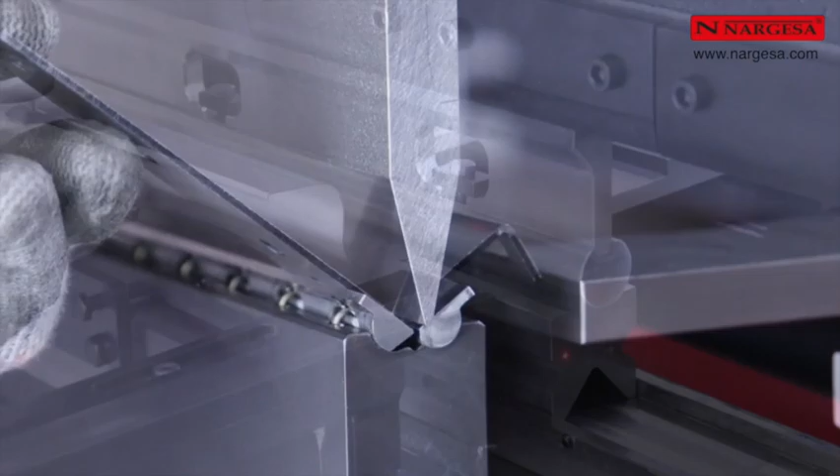All NARGESA machines have been designed, machined, and assembled in our facilities under strict quality controls.

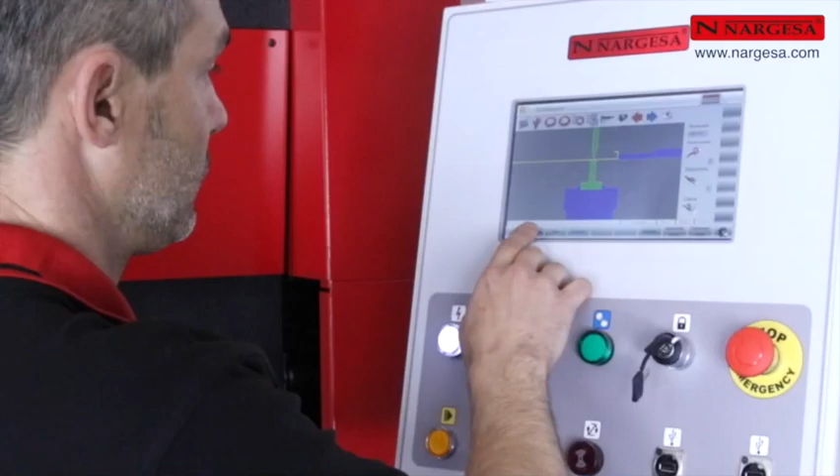We will begin this tutorial clip showing how to obtain this 6-part fold, all of them at least 90 degrees. Before starting to fold, it is essential to check this chart to determine the opening of the die that we must use. In this case, we know that the thickness of the sheet indicated with the letter E is 2 millimeters.

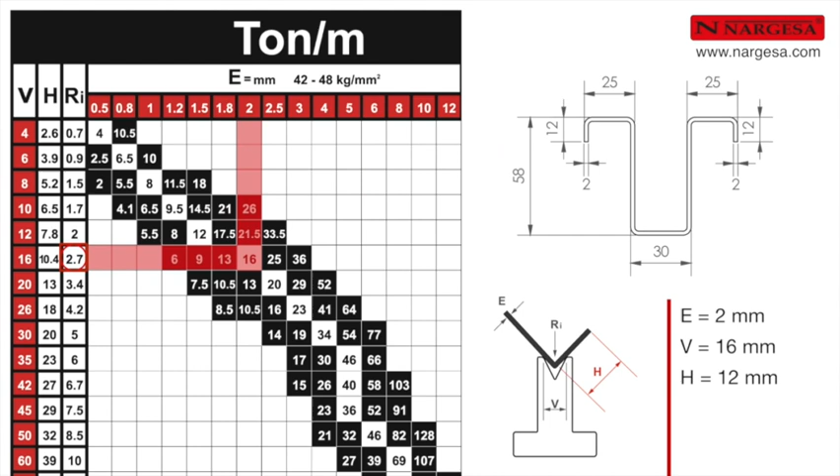For this thickness, it is to be used a V of 16 millimeters. The letter H indicates the minimum folding flap, or minimum folding length, 10.4 millimeters. In this case, it is enough, since the minimum flap of the piece is 12. The letter R indicates the theoretical internal radius that we will obtain. With 1 meter length, we will need 16 tons to make the folding, bearing in mind that it is a mild steel sheet, with a hardness of 45 kilos per square millimeter.

Now, we select a punch that allows us to make this geometry. If the punch, or the die that we have chosen, does not allow us to make the part we need, the control of the machine will indicate a breakdown or collision as soon as we make the program run.

To create the program, we select New Program, New Graphic. Then we fill in the fields with the data we have taken from the drawing and the chart. We know that the width is 1,000 millimeters and the thickness is 2 millimeters. As for the resistance of the material to bend, we will select values between 31 and 50 to work iron or carbon steel. Normally, it is 45 kilos per square millimeter.

We choose a die out of our library based on the marked requirements. For these parts with little distance between bends, it is advisable to use a die in T, because it is higher and narrower, so it will avoid collisions. The reference of the die gives us all its features. The first figure tells us its height. The second one indicates the opening of the V, and the third one, the minimum degrees of the fold.

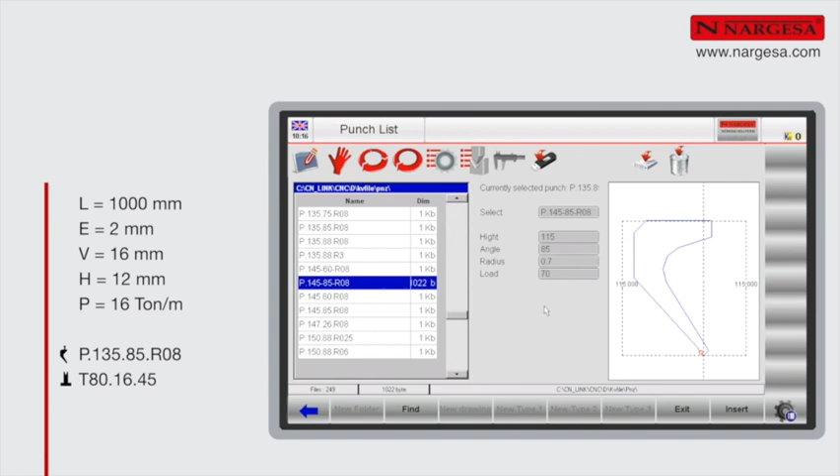We put it in. Then we select the punch, taking into account its characteristics. The first figure indicates its height. The second tells the minimum degree of the fold, and the third, its radius. We insert it.

We begin to insert the dimensions of the geometry by one of the two ends of the piece, with the links indicated in the drawing. We insert the information in the fields in the upper right part of the screen. By default, it shows a distance of 20 millimeters horizontally. We press the up arrow on the CNC to indicate the direction of the first section of the piece and enter its height into the field L, 12 millimeters.

The next section is towards the right. We indicate it with the pointer by pressing this arrow. We introduce its dimension in the field L, 25 millimeters. The next section is down, indicated by the cursor arrow. We introduce its size in the field L, 58 millimeters. We press the arrow to the right and introduce the 30 millimeters in the field L.

Then, we proceed with the arrow pointing upwards, 58 millimeters. We continue with the arrow to the right, 25 millimeters, and finally, down, to 12 millimeters.

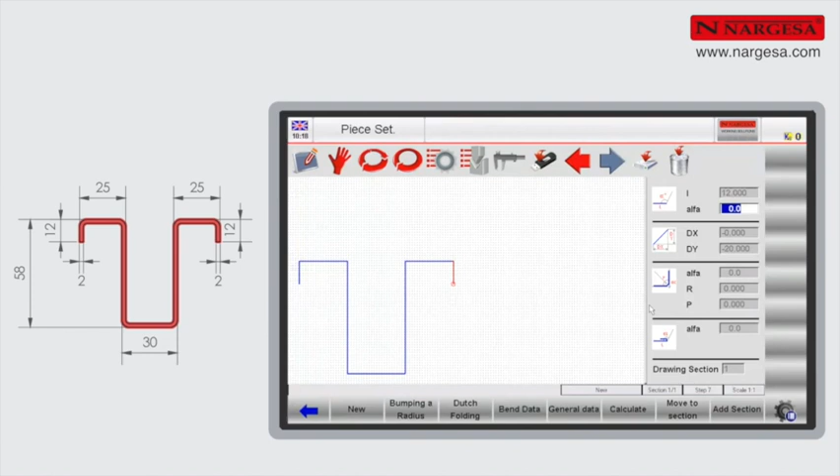Then we press the Calculate button, and the simulation appears on the screen. We press Optimize, and the CNC performs the calculations to find the optimal solution, avoiding collisions and reducing the number of operations. The CNC will indicate when it finds the solution. We confirm and press Simulate, so we can visualize the whole process in the simulator step by step.

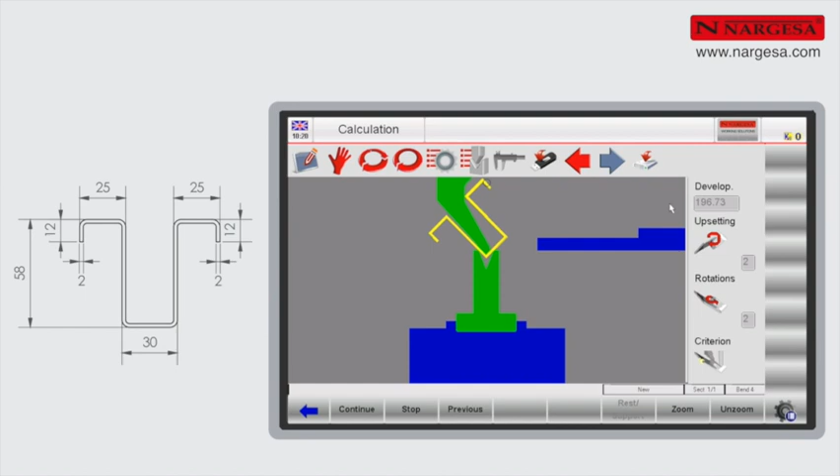It also shows us the development, which means the total length that the sheet to fold must have, the number of upsettings, and the rotations that we will have to make during the folding process. We save the program with the name Demo1. We accept, then we press the button Programming to display all the features of this part on the screen.

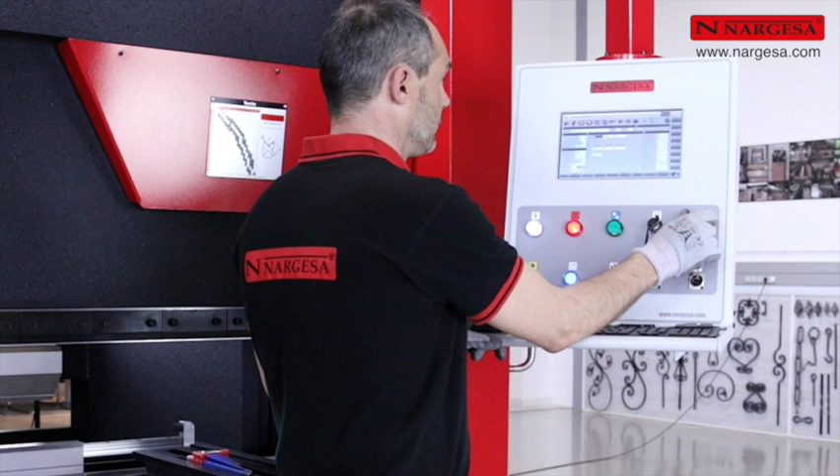We place and fix the punch and die to the press brake. We adjusted the lasers 8 millimeters below the punch as a safety measure. We unlock the emergency stop button, reset the safeties, and operate the machine in manual mode. For achieving a proper operation and durability of the punch, it is essential to fix it correctly.

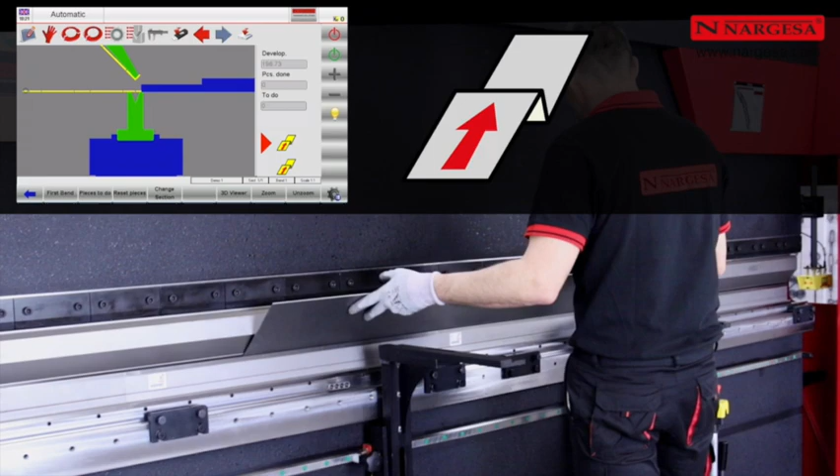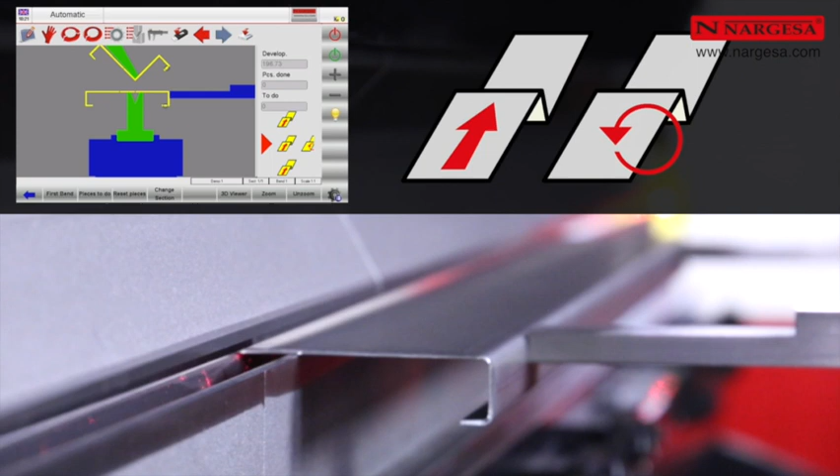We activate the machine in automatic mode to execute the program. As we make the folds, the screen shows how to place the metal sheet for the next operation. This symbol indicates that we introduce the plate by the same side that we are already folding. We continue on the opposite side of it. To finish, we rotate the piece, introducing it by the same side that we are working.

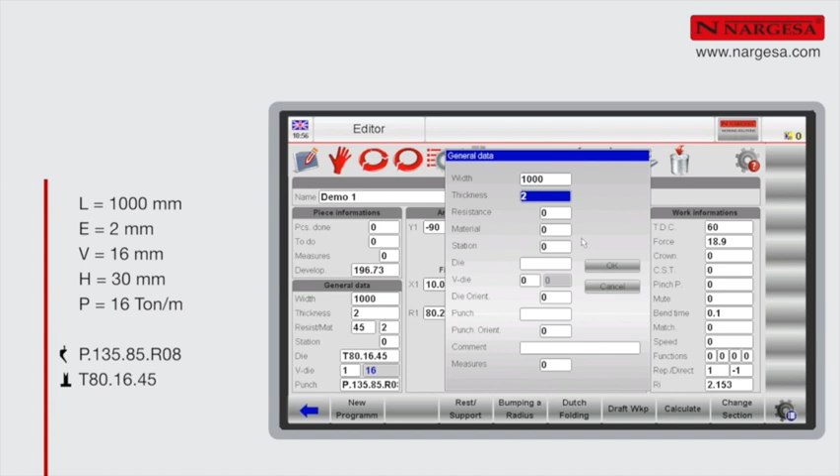We use the same procedure to program this part. We select New Program and New Graphic. We know that the width is 1,000 millimeters and the thickness is 2 millimeters. The resistance of the material to bend is 45 kilos per square millimeter.

We choose the same die and the same punch as in the previous parts because the minimum distance between folds is still small. We confirm. Then, we put in all the sizes of the geometry in the corresponding fields.

We will start at the bottom end of the piece. We insert the dimensions of the first section, 50 millimeters. In the cursor window, we press the down arrow to indicate the direction of the fold and enter its height in the field L, 30 millimeters.

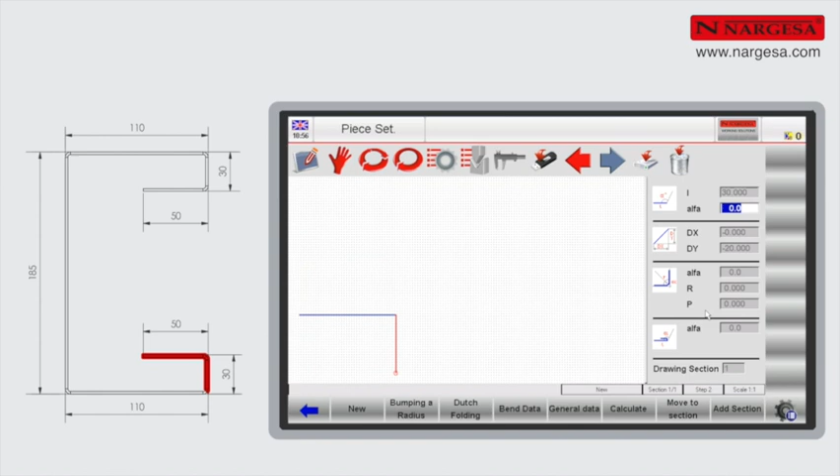The next section is to the left. We indicate it with the cursor by pressing this arrow. We introduce its dimension in the field L, 110 millimeters.

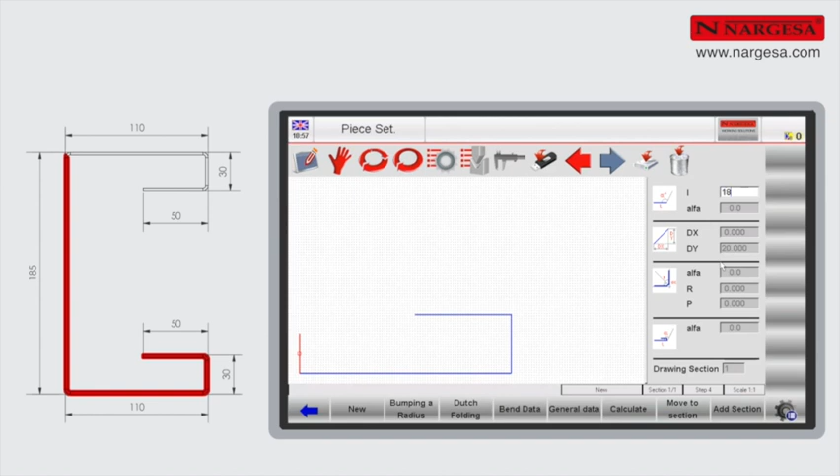The next section is up. We indicate it with the arrow. Next, we introduce the dimension in the field L, 185 millimeters. We press the arrow to the right and introduce the 110 millimeters.

We proceed with the down arrow, 30 millimeters. Finally, with the arrow to the left, 50 millimeters.

Now we press the button Calculate and the simulation appears on the screen. We press Optimize, the CNC finds a solution and we confirm. Then, in order to see the whole process, we just press Simulate and it will run from the very beginning.

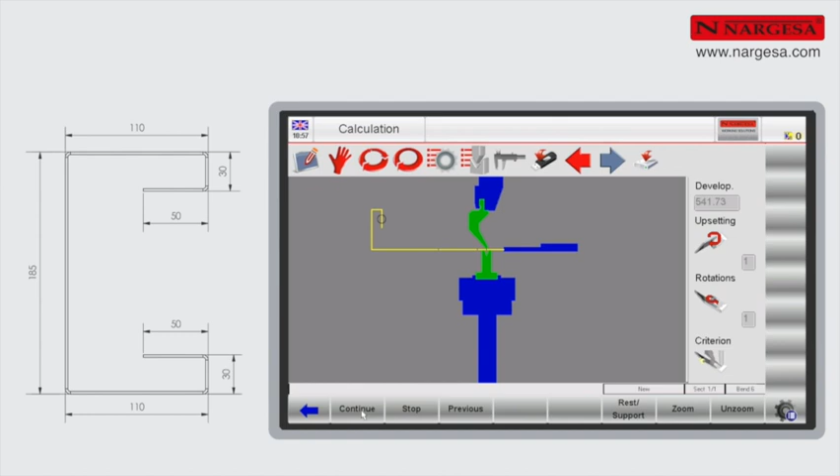The development will allow us to know that we must cut the metal sheet to 541.73 millimeters to be able to fold this piece with these dimensions. In the process, we will make one turn and one rotation. We save the program on the disk with the name Demo 2. We confirm. Then we press the button for Automatic Mode to execute the program.

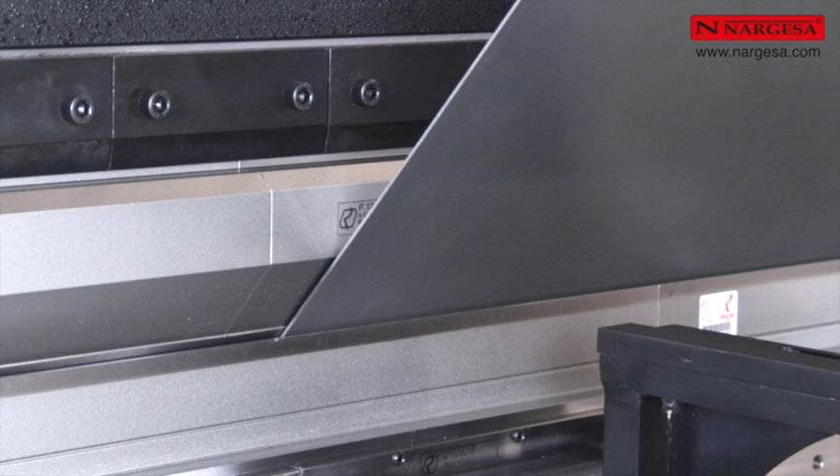There will be some moments, and due to the tolerance of the materials, when it is possible that the folding angles need a correction. To correct this disparity, we will insert, in the corrections field of each fold, the number of degrees that we need to correct.

In this case, all the folds have been at 91 degrees. We will enter the value 1 negative in the first fold, and we will use the arrow in the menu to go to correct the next fold and so on until we have the 6 bends corrected.

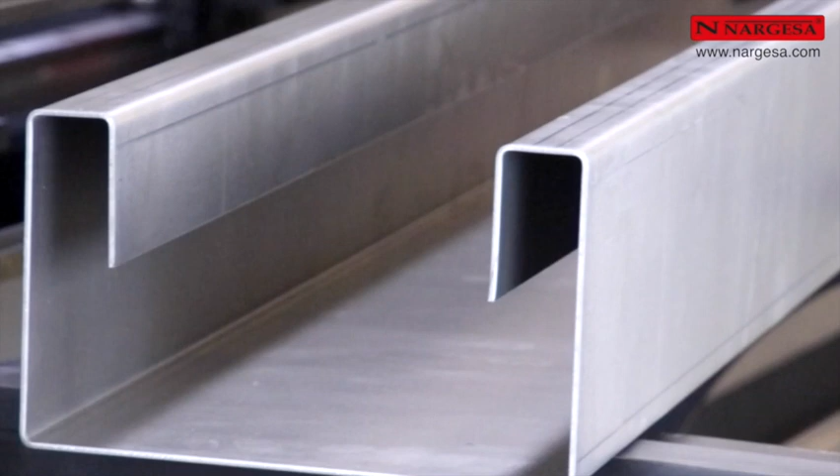We will replace the punch and the die to make the calendar operation. The calendaring is a type of folding that allows to obtain different bending radii in a sheet from multiple sequential bends.

We introduce all the information of the material to fold. For iron, we select a value of 50 kilos per square millimeter.

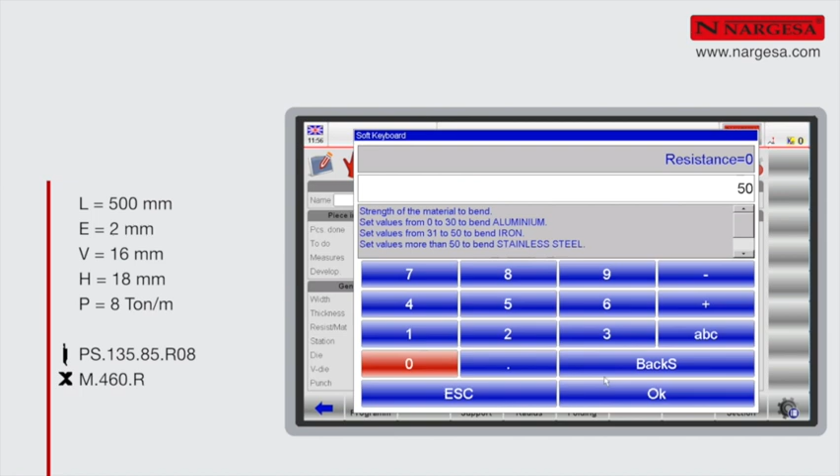We will use a multi-V die because the width of its base will provide us with more stability. We must indicate the slot that we will use. As we have already seen, the optimum slot for 2 mm sheet is the V of 16.

Whenever the piece to obtain allows it, we will use punches that work on its vertical axis. These kind of punches have a better resistance to pressure because unlike the previous punch, the axis where the force is made is solid.

We proceed to enter the dimensions of the piece by pressing the up arrow of our keyboard to indicate that the first section is vertical.

In order to program the calendaring operation, we press the Bumping a Radius button. By default, we see this direction of 90 degrees, a radius of curvature of 15 millimeters, and a distance between each fold of a sequential pitch of 3 millimeters.

We enter the data for our calendaring. The direction is already correct. As for the curvature radius, we enter 40 millimeters. And finally, we put a length of 5 millimeters between fold and fold. We choose this length depending on the type of finish we want. The less distance we leave between the folds, the better the curve will be defined and finished.

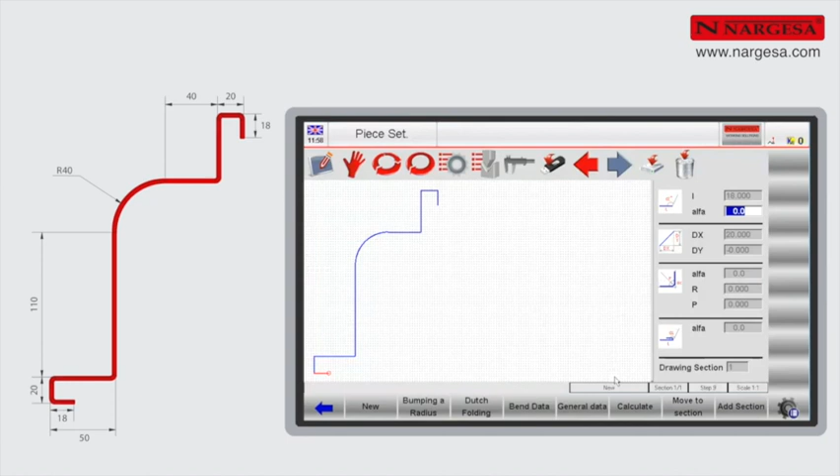In those cases in which it is possible that the sheet does not get placed correctly and falls, we can use the support of the gauge needles to hold it during this operation. This eases up the folding process.

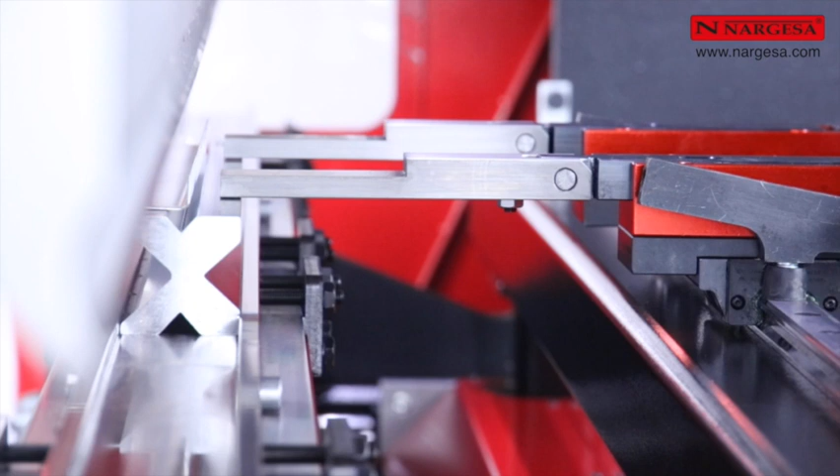In this sequence, we can clearly see the function performed by the gauge support needles. They hold the weight of the sheet and act as a stand, so the handling could be easier and smoother.

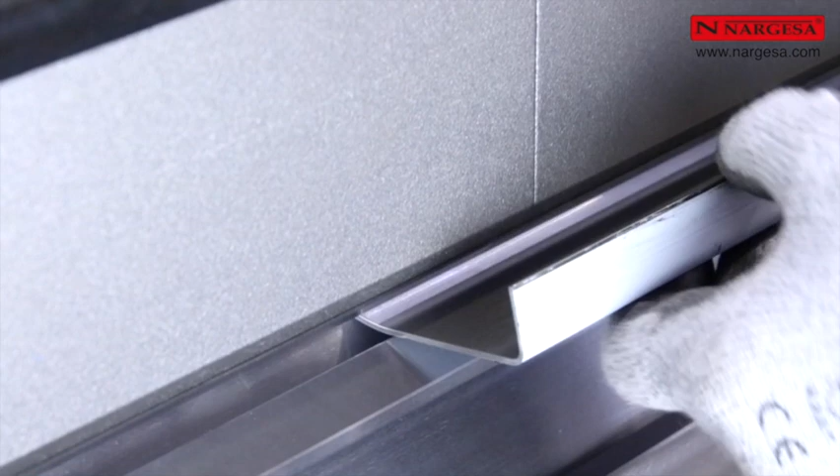We place the swinging die with springs to make bends of 180 degrees. These dies have got two folding areas. In the first zone, we perform the previous folding, obtaining a more closed angle than 90 degrees, and in the second, it makes the Dutch folding to 180 degrees, or crushed down.

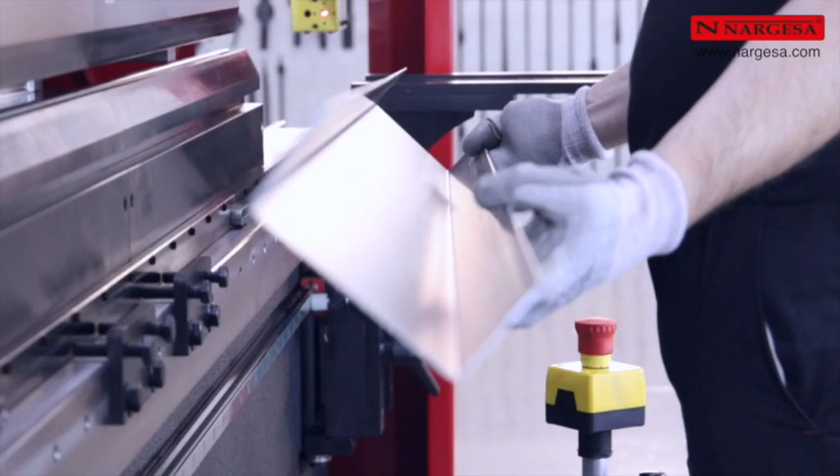We are going to make this especially complicated piece, and we will check that it is really the control of the machine, the one making all the job.

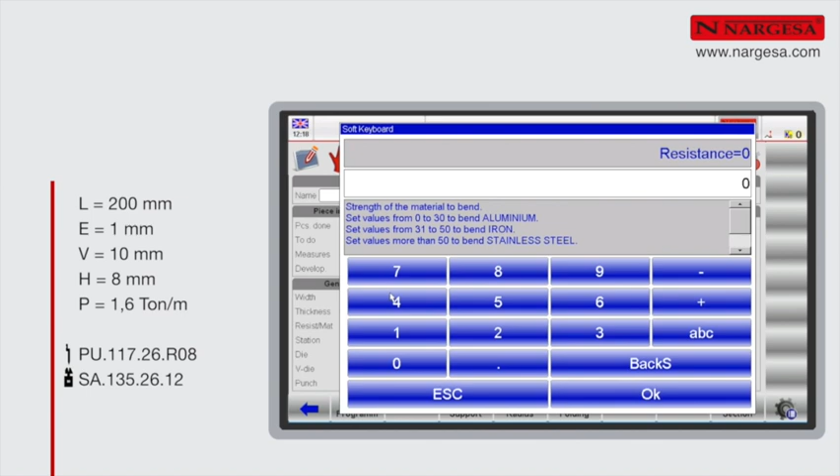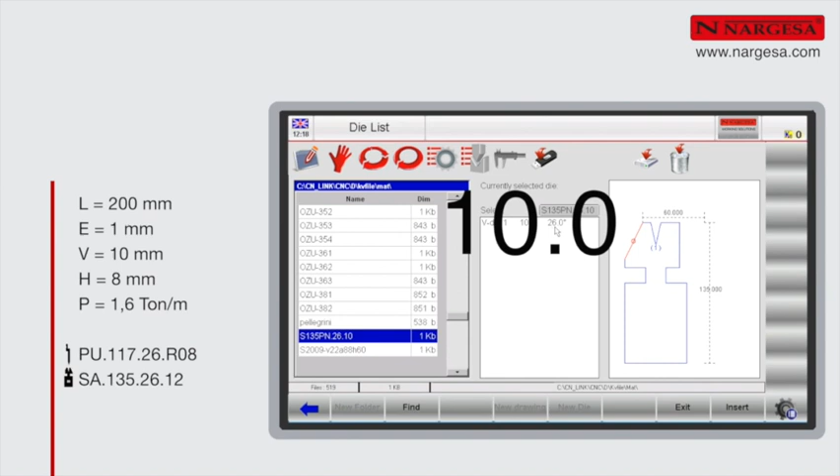If we want to program this type of folding, we proceed in the same way, entering the material information. We insert the die of 26 degrees and with the V of 10, indicated for sheets of 1 mm. To be able to do the deep folding, we must use a punch with the same degrees as the die, in this case, 26 degrees.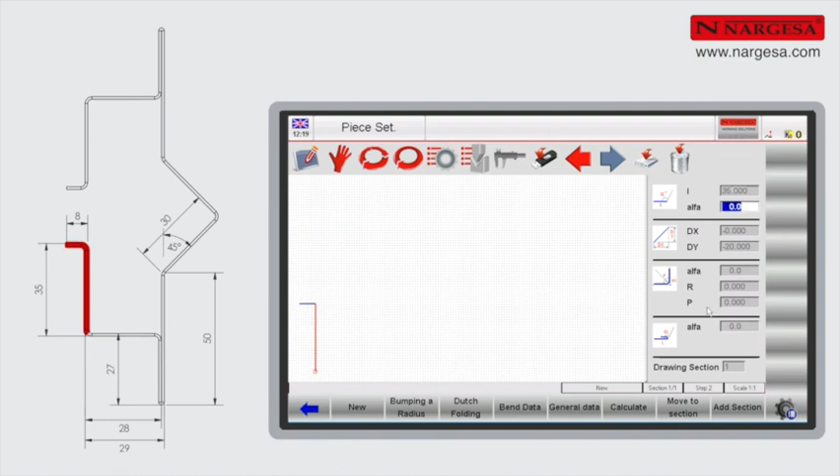To define the Dutch folding operation, we select the Dutch folding option and insert a 60-degree angle in the alpha field. This will be the first one of the two folds. The second one will always be the deep fold, so it's all the way through. We continue with the 50 mm length until the next bend.

We indicate that this fold is diagonal to 45 degrees by using the cursor arrows, and that it has got a length of 30 mm. We also specify the direction of the next fold with the arrow of the cursor, forming an angle of 90 degrees.

In the next Dutch fold, we proceed in the same way by pressing this button and indicating an angle of 60 degrees.

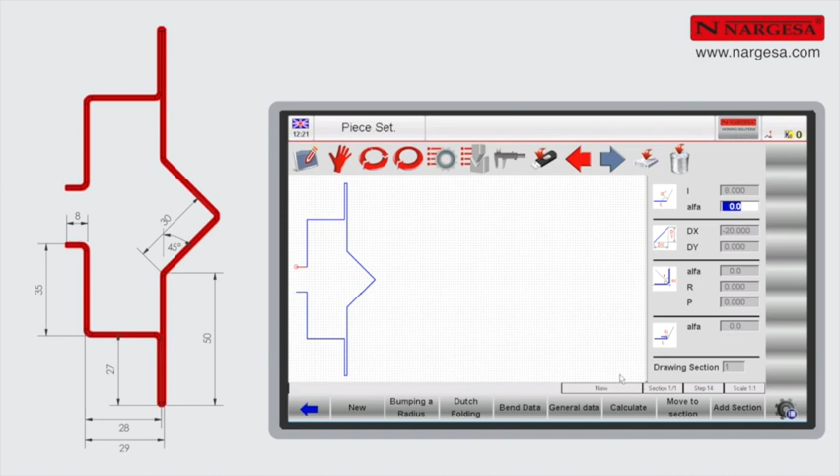When we order the machine to make the optimizations, the CNC has control on the gauge movements. We observe perfectly the movements of the x-axis of the gauge on the simulator. This x-axis is the one that moves forward and backward. We can also get to see the movement of the r-axis, which moves up and down.

The press brake CNC calculates and performs automatically all small movements of the gauge. If it senses that the piece will collide with the rear gauge while making the folding operation, it will move it away some millimeters to avoid this collision.

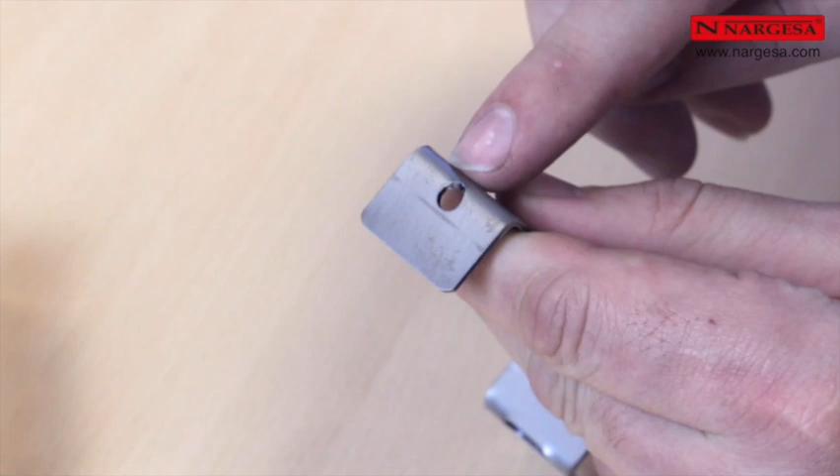The finished qualities of this type of folds are perfect. We can see it in the following examples: a folding operation using a conventional die and the other with the Rolla V die.

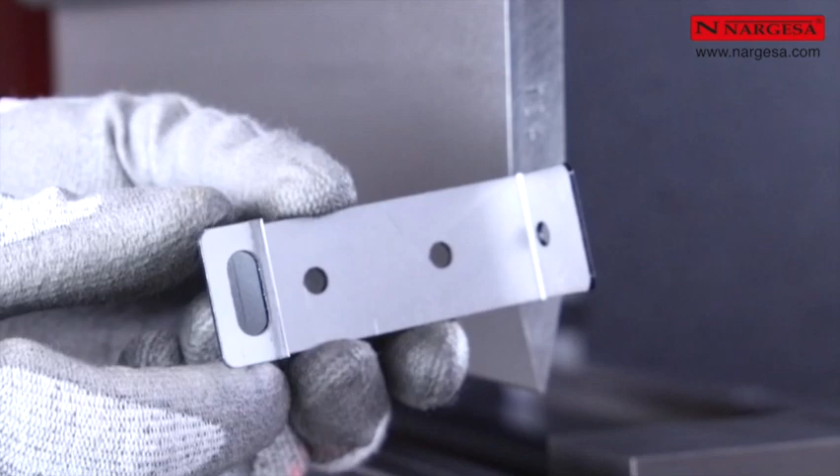There is the same problem with the minimum flap in diagonal folds, which we can solve if we use the Rolla V die. The characteristics of this die are optimal for folding polished stainless steel sheets, so we will obtain a marks-free folding result, 100% guaranteed.

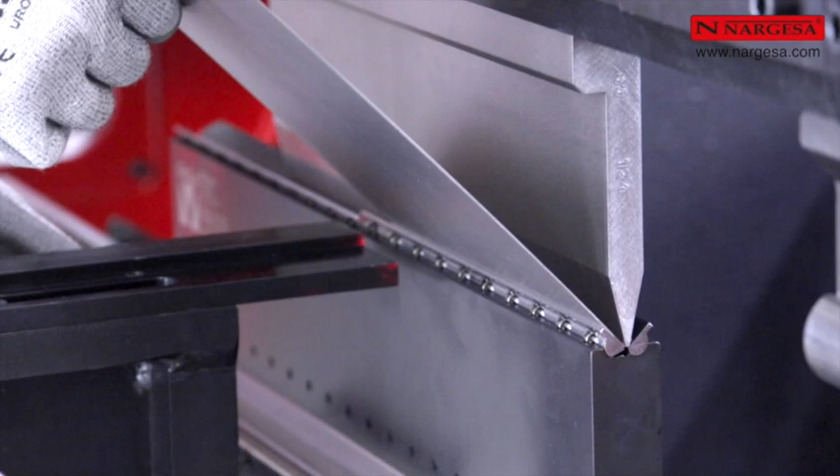The length of the fold of the MP3003 CNC enables us to place several punches and dies to perform different operations at the same time, which opens up the door to different workstations so all the piece will be finished in a single manipulation. In the first zone, we will make the fold of the minimum wing with the Rolla V die.

In the second zone, we will perform the fold with a punch for a big radius. These punches are fixed to the end that can be placed on the machine and allow us to make these bends with different parameters just by changing the end of the punch.

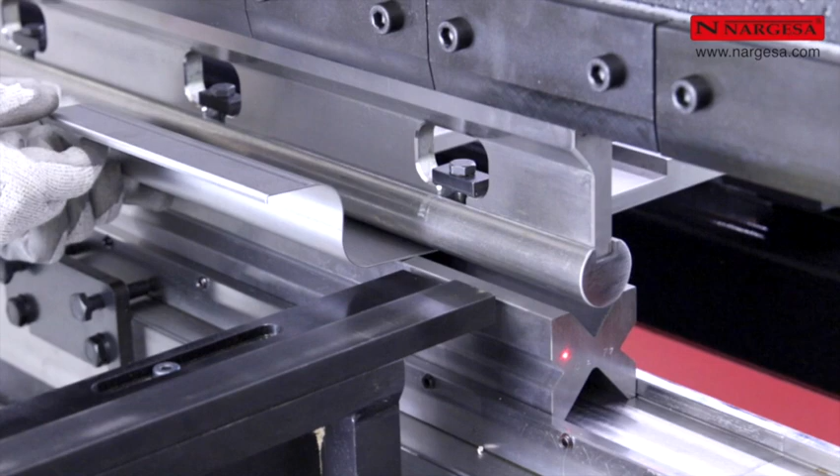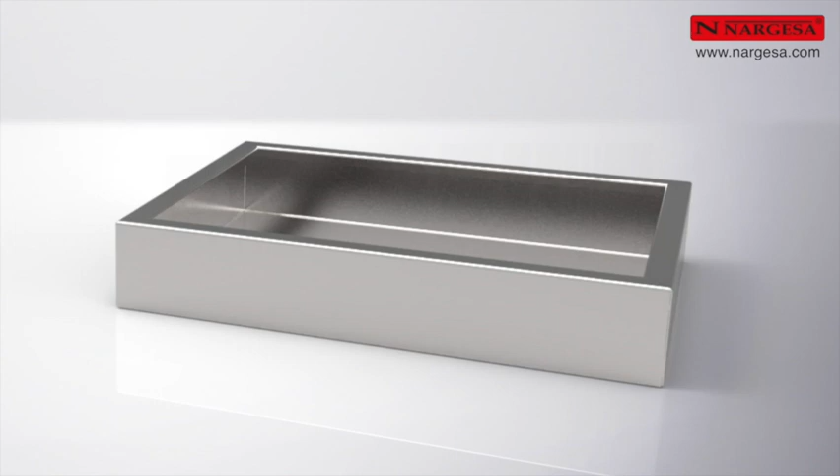All punches and dies can be supplied in a sectioned version. This feature is essential to develop parts with two or more sections, such as trays or boxes, where the folding axes are perpendicular. We put the anvils in both ends. Its shape, with longer length in the lower part, will allow us to make the folds that close the piece. We select the different sections of the punch so that their total length is less than the size of the largest fold.

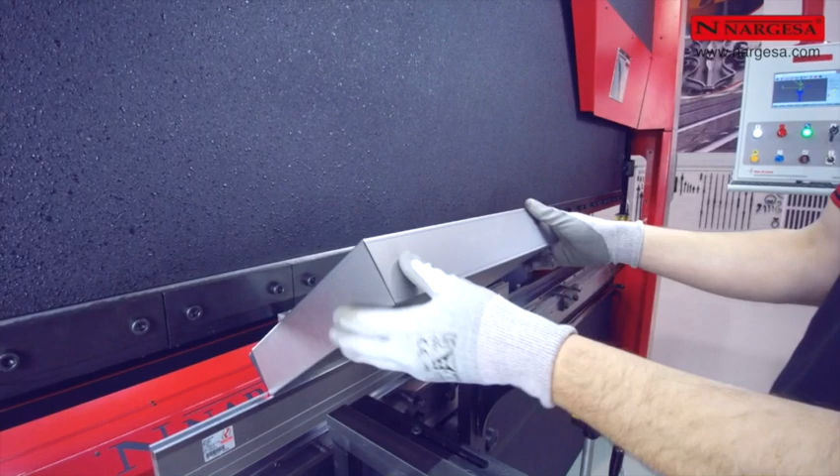In this case, the largest fold is 400 millimeters, and we will place the punches so that their total length is 390 millimeters. We always bear in mind the largest fold, because that way we make sure the punch length is enough to perform all the folds of the part to obtain.

For the programming of the folding of boxes, we will generate two sections. For inserting the information, we can begin with either of the sections indistinctly, because it will be the CNC indicating the order of the folds. In this case, we first insert the dimensions of the 400 mm section. It uses a T-shaped die with a V of 10 mm, mostly recommended for 1 mm thick sheets.

Once we have all dimensions inserted, we press the button Add Section, and then the button General Data. It shows a chart we must complete with the data of the second section. We will only modify the length, because the other information is the same as in the previous section. We proceed to the introduction of the dimensions.

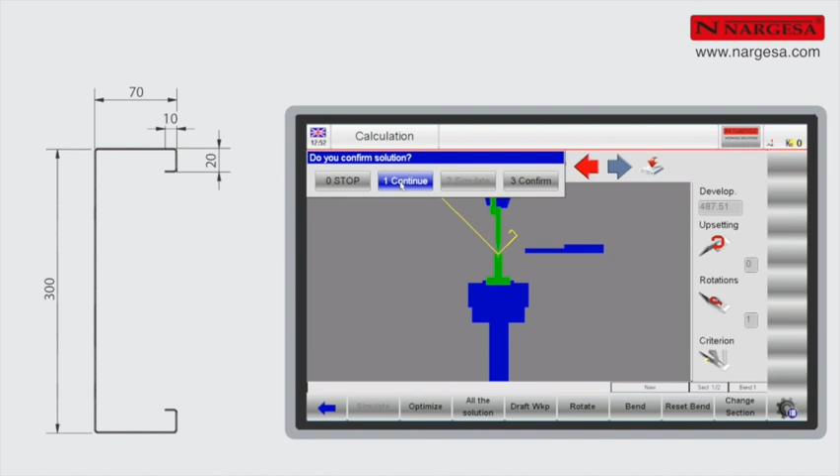The simulator indicates the development and the section number at all times, section 1 of 2. We confirm to see the simulation of the second section of the piece. As in the previous pieces we have made, it shows the development and the section number, 2 of 2.

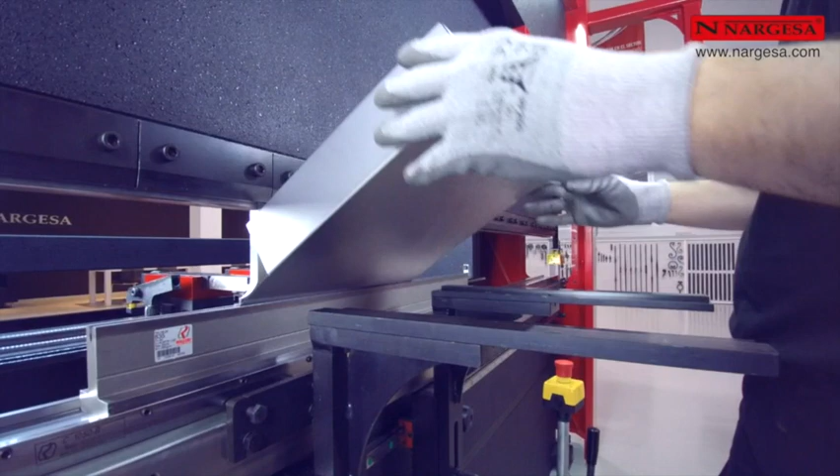On this part of the process, we can see why we use the horns to fold boxes. It would have been impossible to make these last folds, since the side parts we had already folded would have collided with the punch.

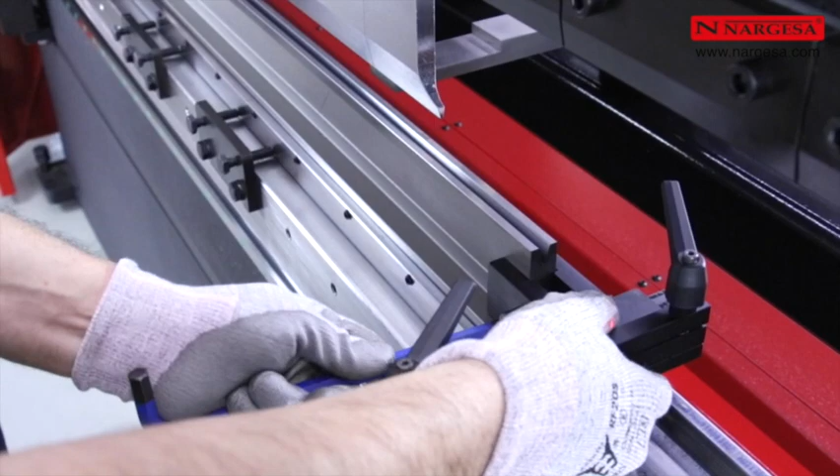For folding without marks with a conventional die, we suggest the use of this protective film that we place on the tensors, which fixes at the same time to any die. This material eliminates friction between the metal sheet and the die, obtaining a result without marks, optimal for stainless steel, aluminum, and delicate materials such as brass and copper.

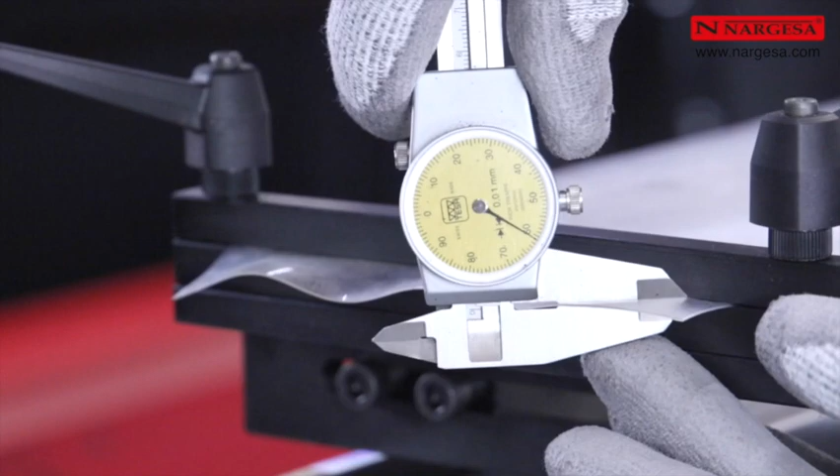It is essential to add the thickness of this plastic film to the sheet thickness in order to program the piece where we will use it.

We check that once we have removed the protective plastic film, we really obtain a folding without any sort of mark. The press brake MP3003 CNC NARGESA has a welded frame, stabilized, and with high-precision machining.

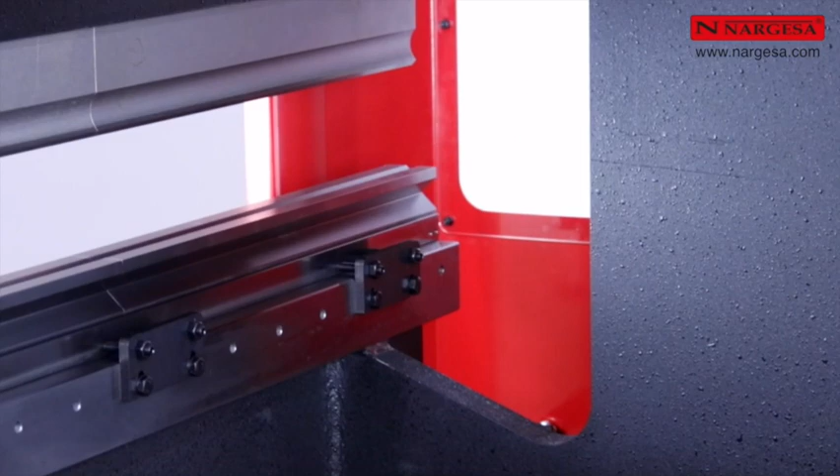The large neck enables the folding of large pieces. It has LED lighting incorporated in the folding area, and centralization of all hydraulic components in a single block. One laser security barrier is also integrated as a safety device.

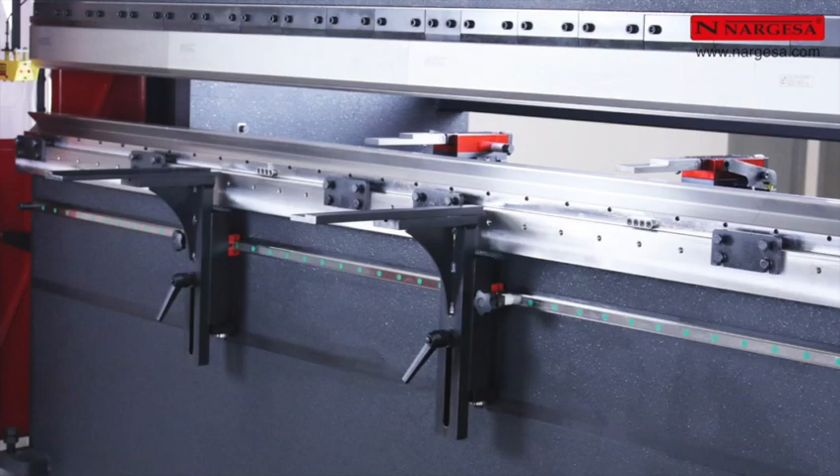The clamping system for the punches is Promecam, with sliding arms for an optional support of the sheet. Folding side doors facilitate the change of tools, and a multilingual interface offers more than 20 languages available.

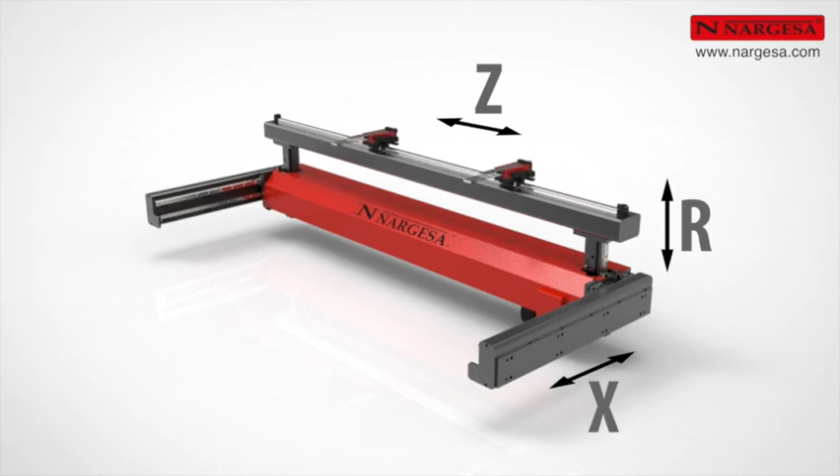However, sometimes the geometry of the piece to fold requires the use of the R axis. This axis allows us to use the gauge at different heights in a much more dynamic way to perform the operation. The incorporation of this axis to the machine implies, most of the time, the main difference between being able or not being able to obtain one piece.

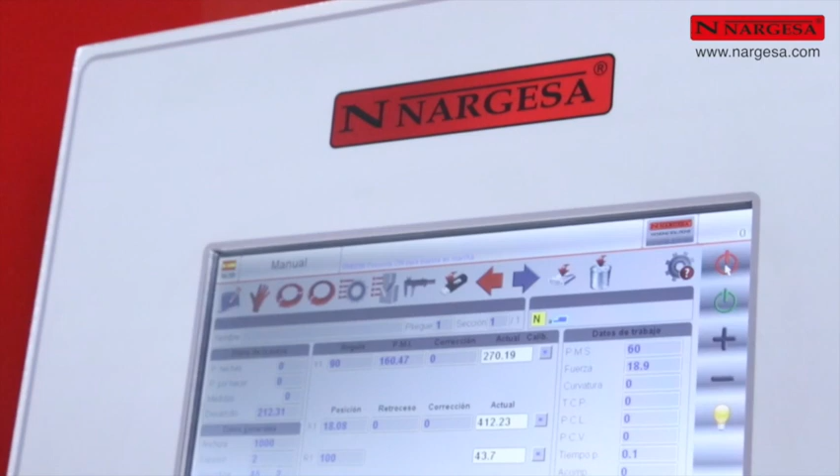The powerful CNC control ESA S630 is the core that rules all the systems and solves out the most complex bends. All these features allow any untrained operator to use the machine, because the control is the one that calculates whether the piece can be made or not.

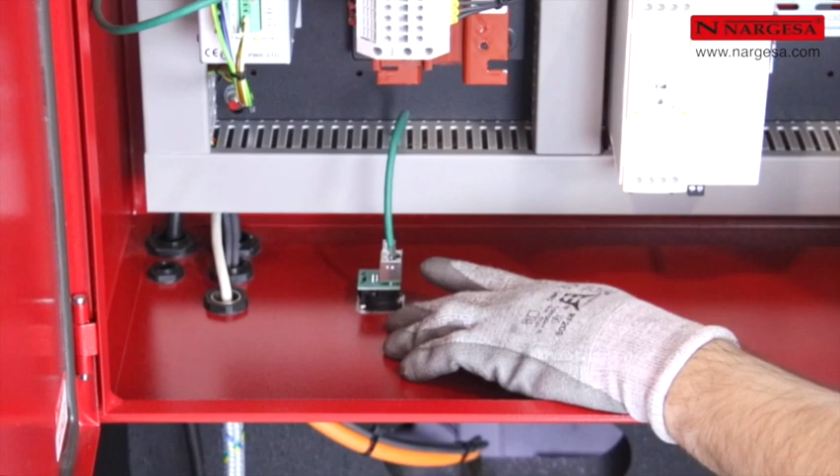It also programs the fastest sequence, counts on the gauges, and indicates at all times the movements and steps to follow by the operator. This press brake MP3003 CNC NARGESA includes an Ethernet port that makes possible any control, management, software update, and diagnosis, locally and remotely.

With the explicit customer's authorization, any NARGESA engineer will be able to access the machine from a distance, which will represent an increase and improvement in the after-sales service and technical assistance that our brand, NARGESA, offers in all the machines that we manufacture.